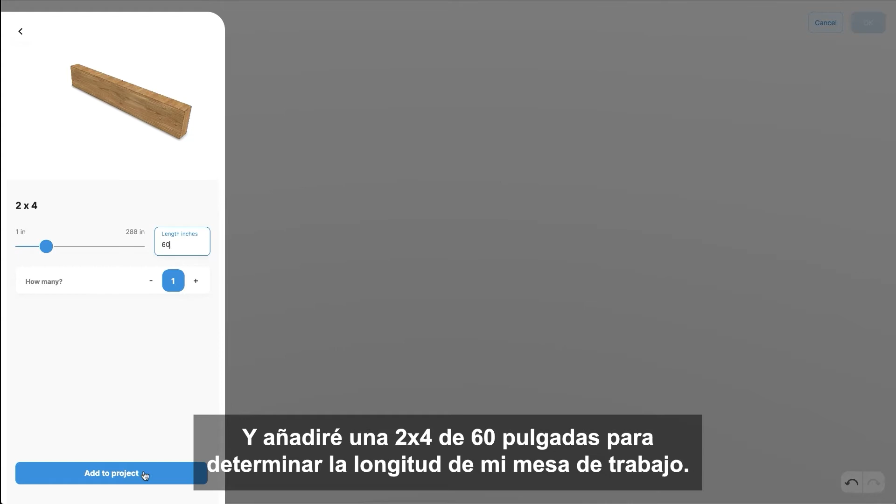Now that I've added my material, I can see on screen there's some controls to move it. By simply dragging, I can rotate in different directions. I can move the material up and down vertically, and I can also free drag the material. On the contextual toolbar, I can duplicate, cut, and delete the material.

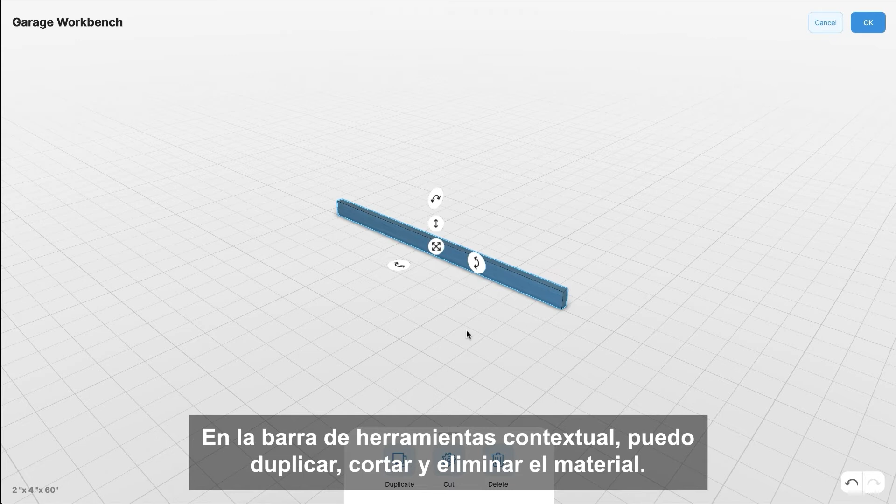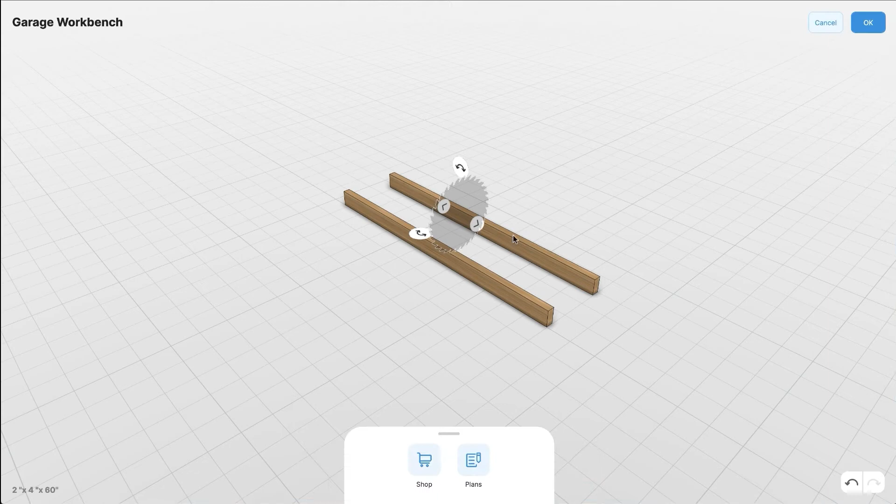Now to determine the height of my workbench, I'm going to duplicate the 2x4, and then I'm going to enter the cut command, and on screen I have visual feedback of a saw blade that I can move in position to where I would like to cut. Roughly at 36 inches is where I'd like the height of my leg. So I'm going to confirm, and now I have a leg that's cut to 36 inches.

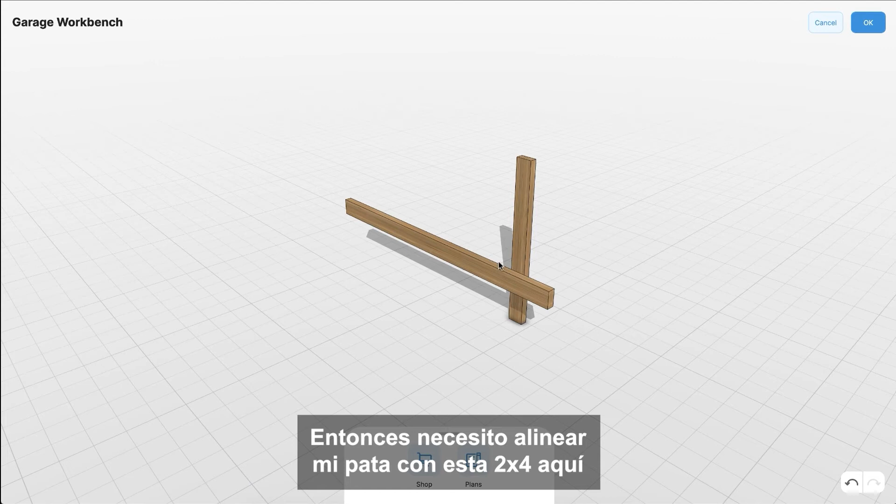I'm going to remove the offcut by selecting it and deleting it, and then I need to move my leg upright. To do that quickly, I can rotate 90 degrees by tapping on the rotate control. Then I need to align my leg with this 2x4 here, so I can snap them together. To do that, I'll select the leg, and then I'll drag it with free drag until I see a magenta highlight indicating that they're perfectly aligned.

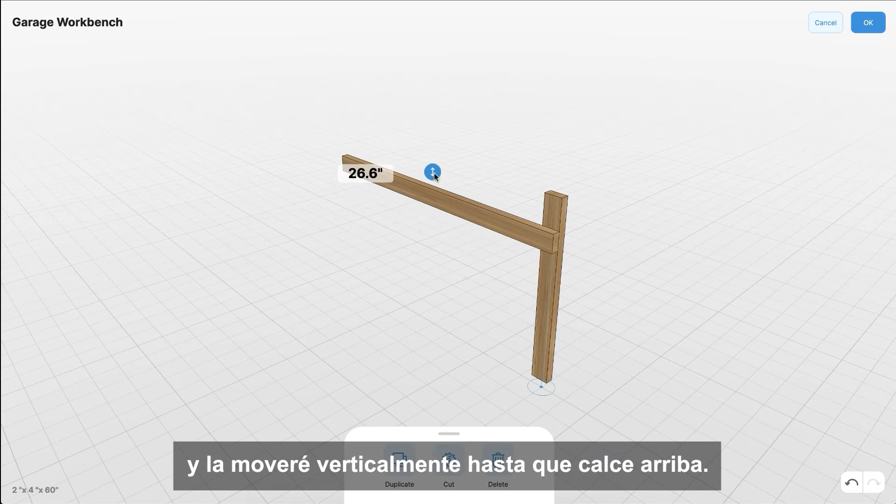Then I'll move the leg to the other 2x4 and snap them together. And then to finish off the positioning, I'll select this 2x4 and move it vertically until it snaps to the top. Now I'll continue on building my workbench.

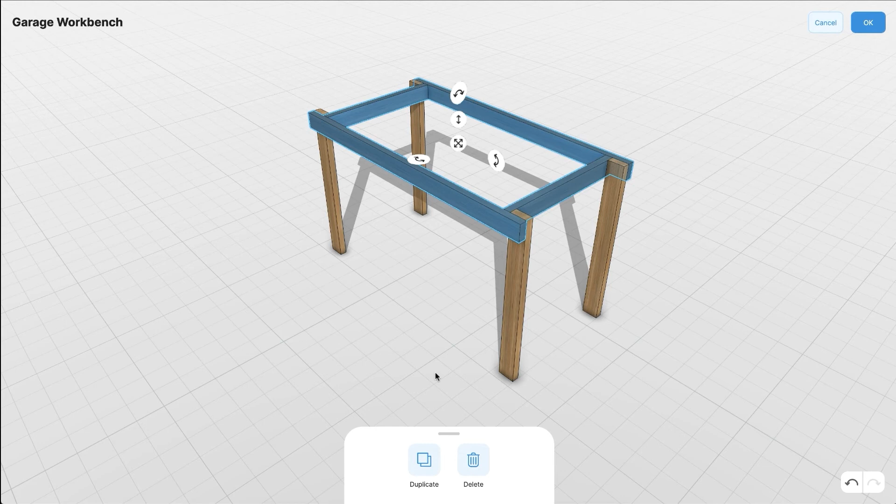Now that I have the basic structure of my workbench, I want to create a shelf on the bottom. To do that, I'll multi-select the top frame by tapping on the materials I would like to select, and then I can duplicate those materials and position them about 8 inches off the floor. And that creates a frame on the bottom for my shelf.

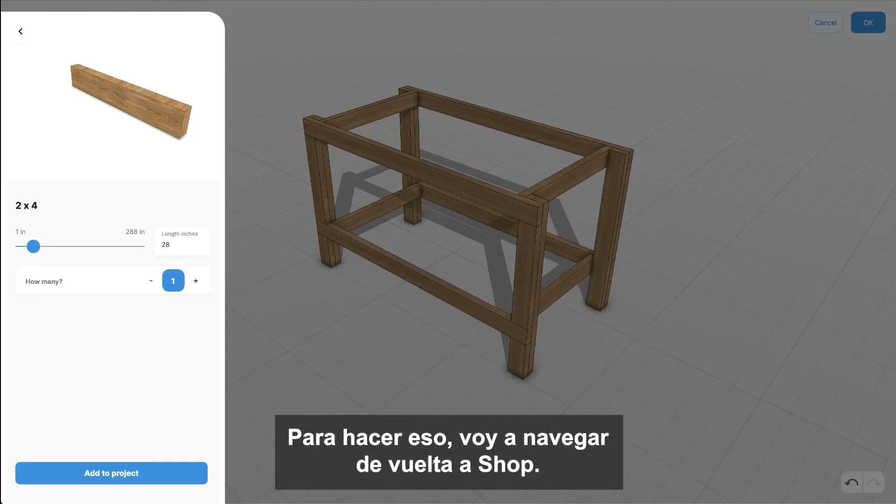Now the last thing I need to do is add a top for my workbench. To do that, I'm going to navigate back to the shop, and I'm going to navigate to sheet materials, and I'm going to choose a 1/2 inch sheet of plywood. Then I'm going to add it to my project. I'm going to position the plywood so it's aligned with the top of my table and move it into place.

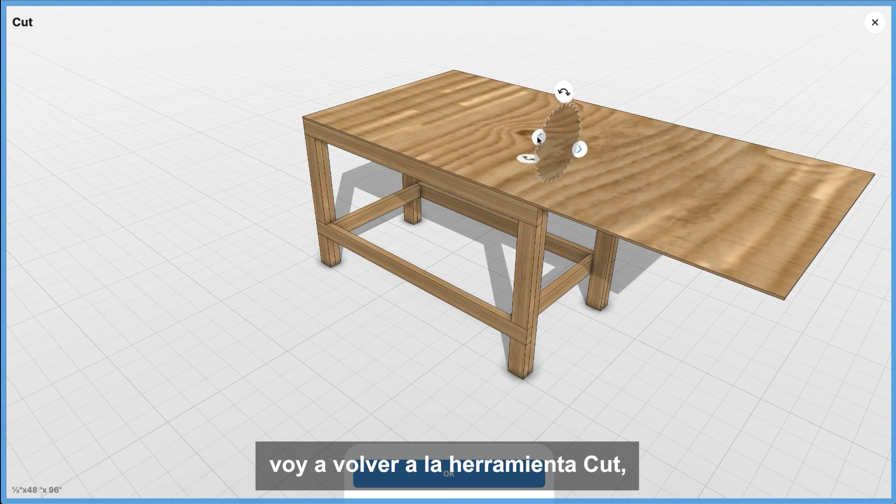Then, to fit it to the top of my table, I'm going to return to the cut tool and then align the cut with the edge of the table. And that explores some of the basics of 3DByMe.